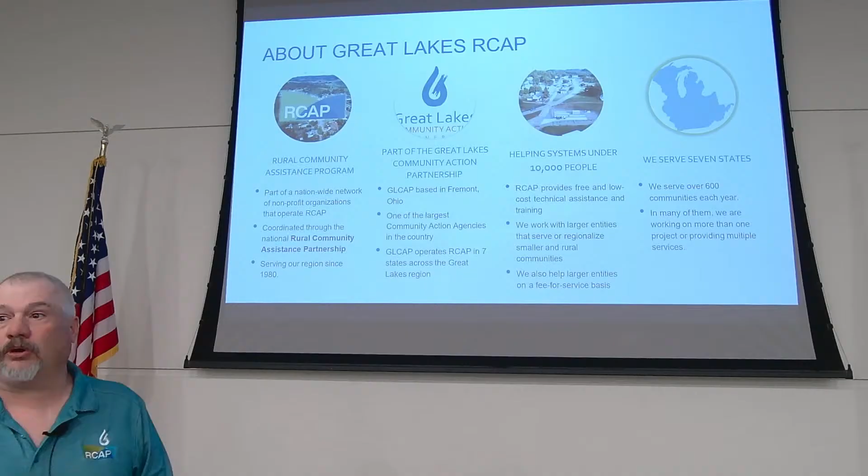So James talked about it, there's a few slides here of what we do. Again, this is a national program. Our region is the Great Lakes region. We're based out of a headquarters in Ohio, but they do have dedicated employees in the state. And again, I'm here locally. I have business cards up here for anybody that needs to talk technical, and you guys fit within our realm. Generic, our mission: improve surface water protection, environmental compliance of water and wastewater. The US EPA funds us.

Go back. Oh. I feel like I'm, because of this camera here, I'm trying to get in front of everybody. So

Again, we have to put these things in our presentations because that's who pays us to do these trainings. So again, we've got a couple people that we need to get some pictures of up here.

Myself and James. I am a licensed water and wastewater operator. I do have experience in class 2 systems. I'm not a class 2 operator. I was going to go take my exam when Illinois American bought our place, and they told me I didn't need to, and so I haven't had a requirement to since. But I do have fairly serious experience in Class 2, and I was going to go get my exam right during the buyout. So I am a Class 3. I'm a Class B water operator with time in an A system.

So, we've done introductions and overviews. We're going to talk about lagoon types, aeration methods, lagoon design configurations, roles of algae, thermal turnover, and pros and cons of lagoons. There are tests. We're not going to issue any tests, but there are tests in this training, so we'll kind of skip over those slides.

One of the items when we were asked to come do this training was a question on feedback to you guys on herbicide chemicals to use around lagoons. Unfortunately, because of our federal funding, we're not allowed to endorse any certain brands or things along those lines. But I wanted to make sure that in that conversation I did elaborate, when we get to it, on what you should look for when you're trying to do weed control.

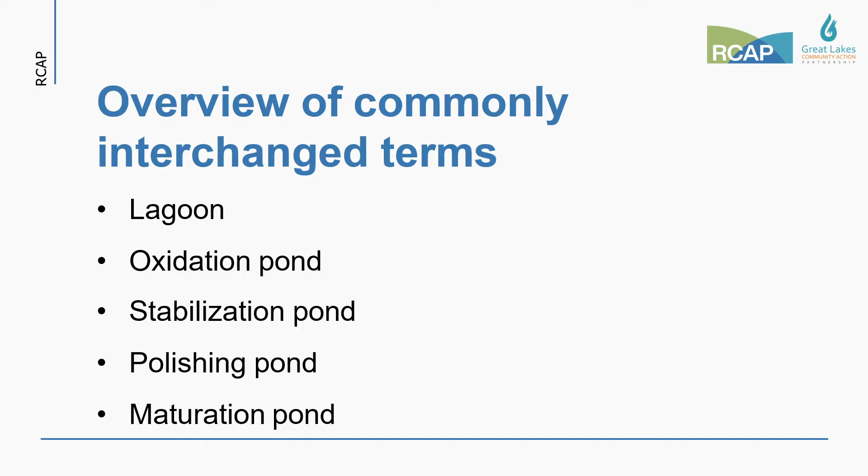So, commonly interchanged terms: lagoon, oxidation pond, stabilization pond, polishing pond, maturation pond. So we have 3 types of lagoons: anaerobic, facultative, and aerobic. Facultative is essentially a combination of aerobic and anaerobic zones, which most of these operators in here, I believe, would be.

Am I out of the picture? No.

Especially dealing with activated sludge, you're doing your different zones within your oxidation ditches and things along those lines. We know with the treatment of wastewater, in order to get full treatment, we need a combination of aerobic and anaerobic processes to completely provide that treatment.

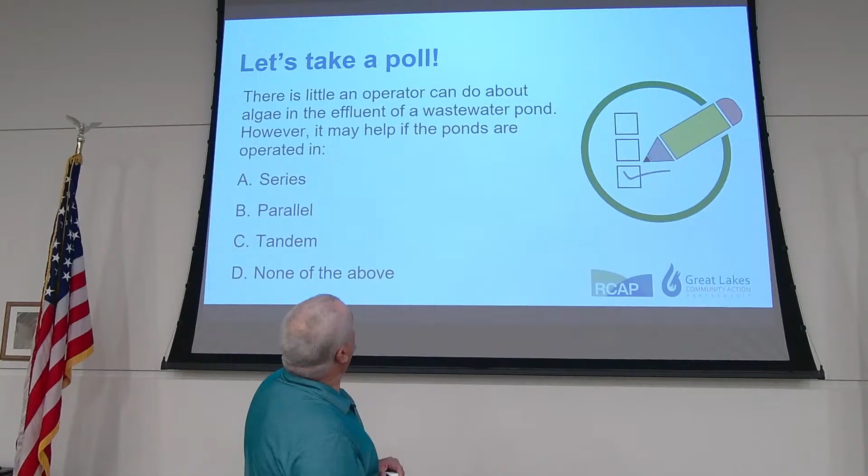There's little an operator can do about algae in the effluent of a wastewater pond. However, they may help if the ponds are operated in series, parallel, tandem, or none of the above. I'm not necessarily looking in this training to test you guys on there. We would control the algae in series. We would try and contain the algae in one particular cell where that activity is taking place as part of the treatment process.

So here are some different applications: aerobic, facultative, and anaerobic. Anaerobic is commonly used in industrial wastewater. Your loading of BODs or CBODs, typical detention time in days, typical depths and comments. Subsequent treatment normally required, because to truly fully treat wastewater, you're going to need a combination of aerobic and anaerobic. So a lot of places are using facultatives, or they're setting it out in series, to get those zones taken care of.

So, facultative is common: raw municipal wastewater, effluent from primary treatment, trickling filters, aerated ponds or anaerobic ponds. Aerobic is generally used to treat effluent from other processes, and produces effluent low in soluble BODs and high in algal solids. So there is some aspect there of why you would pick one versus the other.

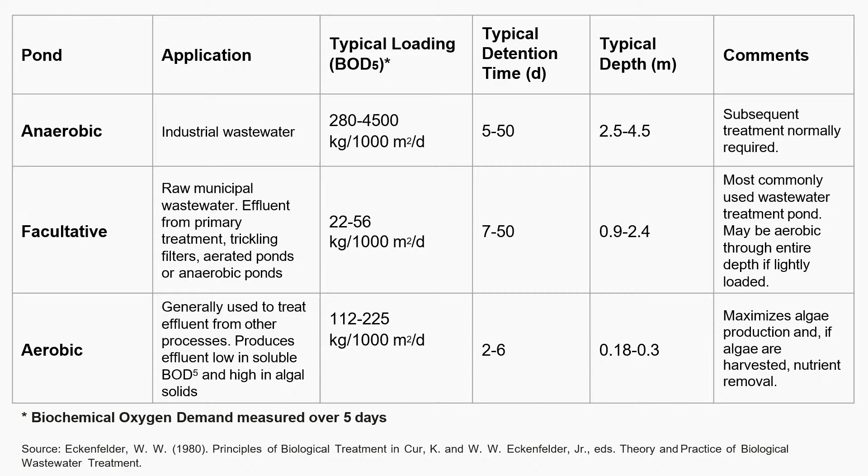So, do we have any lagoon operators in here? Okay. You want to talk about your lagoon at all? Good old Farmington? No? You're running facultative out there, right?

Facultative lagoons, again, it's about a balance. A lot of times these facultative lagoons are one cell. Is this a pointer? No. You have influent coming into the pond. It's based in zones. Your facultative bacteria and anaerobic bacteria are intermixed among the zones. It's very common around the 8-foot to 10-foot level in facultative lagoons. That's kind of where they're designed anymore. I haven't seen any deeper than that. Doesn't mean they're not out there.

So in those facultative lagoons, we want both processes happening. Facultative lagoons operate on a diurnal cycle. Anybody know what a diurnal cycle is? Day-night cycle. So in these facultative lagoons, you're going to have DO changes throughout the day.

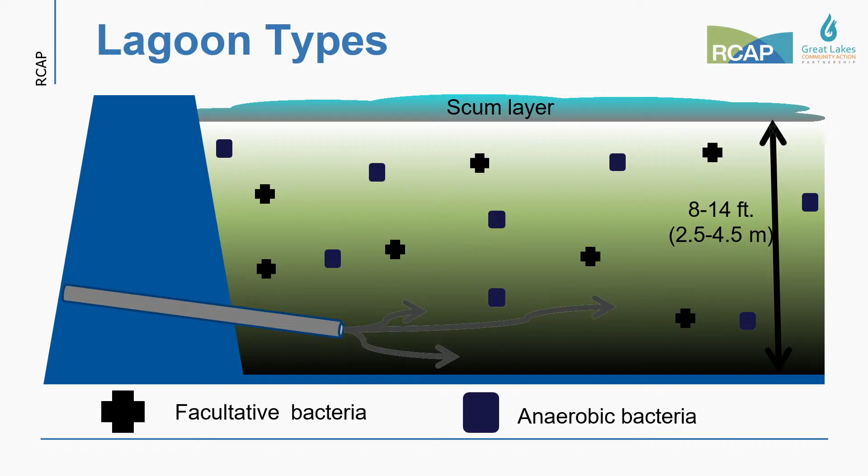Anaerobic lagoons are used mainly for the treatment of high strength or commercial wastes. They lack dissolved oxygen throughout. The treatment depends on fermentation of sludge at the bottom. It's highly effective in destroying organic wastes. Depths are typically 8 to 14 feet. Effluent requires further treatment, because you're going to have ammonias and nitrogen content coming out of that anaerobic environment, and now you need the algae consuming that. That algae growth is consuming the NH3, taking it in and dividing to build more cellular microbial algae.

Take a poll: in the anaerobic portion of the facultative pond, organic matter is converted into carbon dioxide and ammonia, and then into algae in the presence of sunlight. True or false? Anybody?

Methane is usually produced in the anaerobic. So, again, facultative lagoons, we have the bacteria. This is a 3 to 8 foot facultative lagoon. I've never seen one that shallow, but that doesn't mean they're not there. This is just part of the training project that we're given, that we go through and we alter.

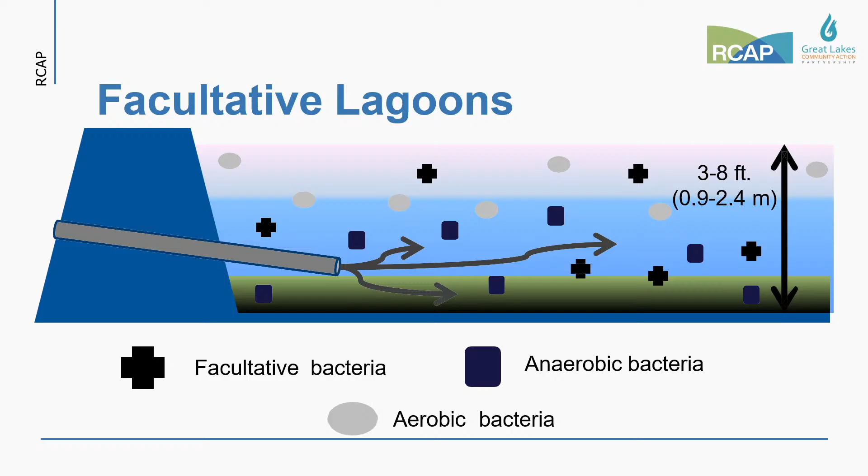Having the anaerobic and aerobic bacteria mixed in. Again, the anaerobic portion is a lot of times breaking things down. That's where your methane gas comes from. Methane gas has hydrogen and nitrogen and carbons in it. That's part of that process. Your ammonia comes out of that, and then you're using that algae to break that down further.

8 foot deep, at least 7 foot of that is sludge; there was only 1 foot of freeboard. It is red. Everything is dead, just like a red tide. That primary cell has just got water going into it. Nothing's happening. And then the water coming out into the second cell has turned into nothing but an algae bloom, and that water's pea green. And this is what they're discharging.

Well, needless to say, that's why the IEPA is there right now, because there was no activity for a long time. And we got called in to help them try and find funding so they can do dredge work and get rid of that sludge so they can actually get the lagoon operating again.

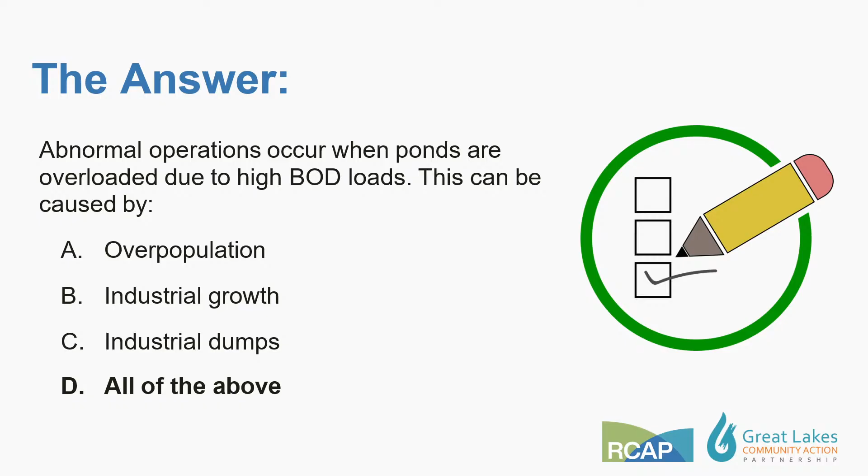So aerobic lagoons, again, that's the use of dissolved oxygen coming in, providing the treatment. Dissolved oxygen throughout all depths, not just zoned off. May use aeration devices to create supplemental oxygen when there may be some depth to it, so it's not enough sunlight, maybe it's turbid, so oxygen can penetrate the wastewater. Used for domestic and industrial wastewaters, low and medium strength. Keep hitting the wrong button. Aerated lagoons require less land and shorter detention times.

Just a couple examples of aerobic lagoons. Another poll: during the day, the algae in a pond consumes carbon dioxide, which raises the pH, while at night they produce carbon dioxide, which lowers the pH. True or false? True.

Part of that process of the algae taking ammonia out of the water also consumes carbon dioxide. It's photosynthesis. As those algae cells grow and divide and create more algae, that's what's consuming the carbon dioxide that's being produced by the anaerobic. Plus, it's producing DO to go back into your aerobic. So again, that change in carbon dioxide will change the pH.

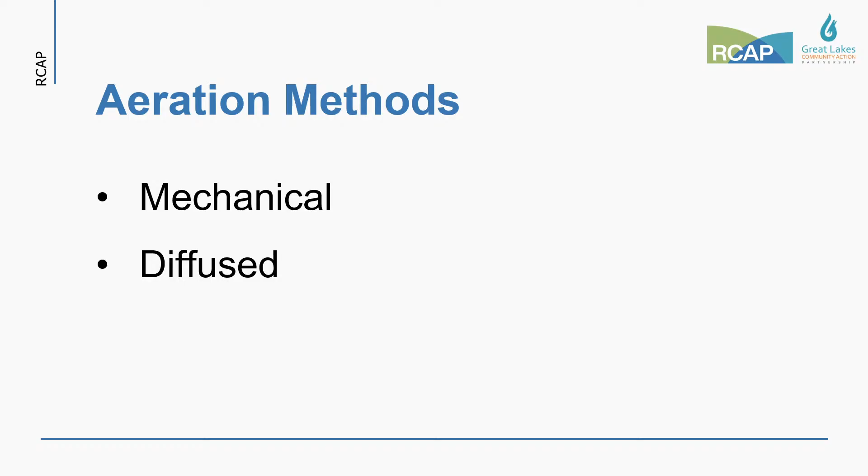Aeration methods, mechanical or diffused. I'm assuming most of you guys are, there's only a handful of lagoon guys here. What aeration do you employ, Mike? Wind? Common? You guys got a lagoon? Okay. Air compressor, diffuse type?

Okay. Okay. Turbulence, disturbance? Okay.

So I actually had one of these in Glasford that was horrible, because in the wintertime that stainless steel gets cold and it turns into nothing but an ice block. One of the things that I changed before Illinois took over: in the waterfowling world, and I am a duck hunter, Mike's also a duck hunter, they make this device called an ice eater that is very good for pulling water from the bottom and pushing it up to the surface. So during freezing temperatures, we can keep an open water hole for our hunting.

Well, I actually took one of those and installed it into my lagoon to keep that process going, because he's talking about wind. Wind going across the pond actually puts DO into your lagoon. So if you can keep open water in the winter, that was one of the aspects that I used in order to keep my DO up. Any questions?

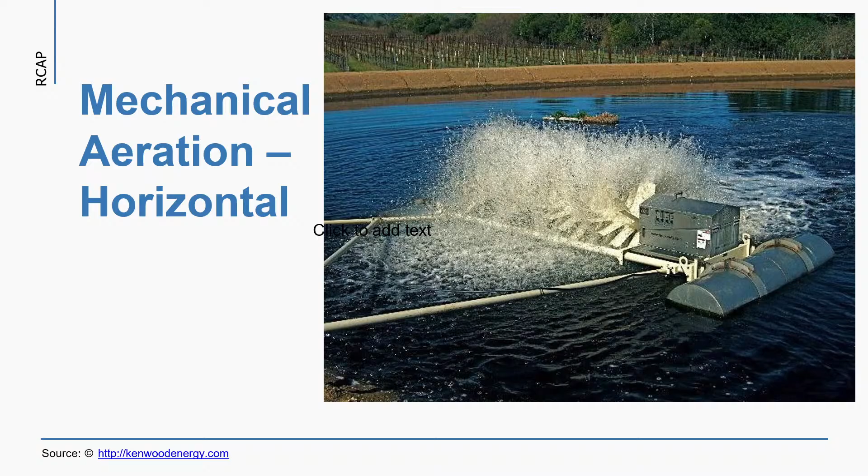Mechanical aeration, horizontal. This is actually very close to an aeration version that I had at the Lakeside plant in Glasford, where I ran extended aeration ditches, and we had paddles like this in both ditches that actually beat dissolved oxygen into the water. Stir agitation, diffused oxygen through compressed air being plumbed out through a distribution plumbing system.

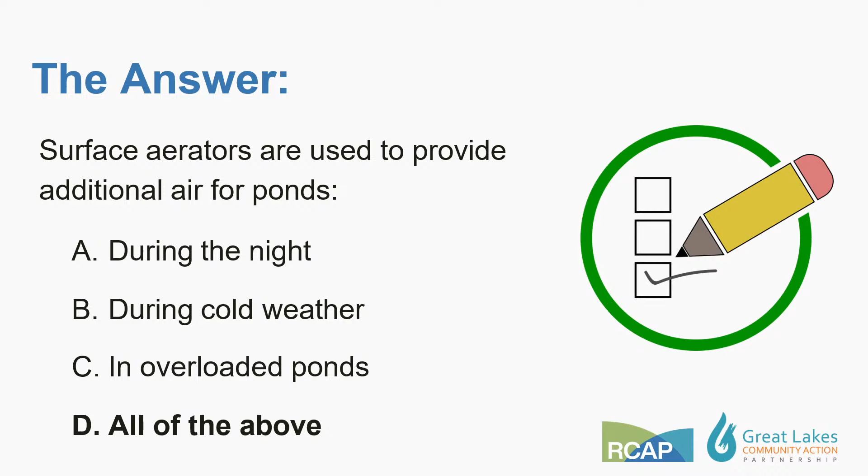Aeration and energy efficiency. Aeration can be 50 to 60% of the energy used at a wastewater treatment plant. If you're running a gravity system, like you would with a lagoon, you may only have 1 or 2 pumps, but you're also running an air compressor to diffuse aeration. It could be a sizable portion of your energy costs. So properly using the pneumatics and hydraulics to the most efficient advantage will help you overcome some of your financial issues. Doing good maintenance and keeping it running efficiently.

Coarse bubbles versus fine bubbles. Fine bubbles can be 35% more effective versus coarse bubbles. The smaller the bubble, the better your oxygen is going to dissolve within the liquid. Blower size data, raw data versus effluent data, evaluating your influent, your effluent, and maybe picking some place in the process for doing another test. How do I look here?

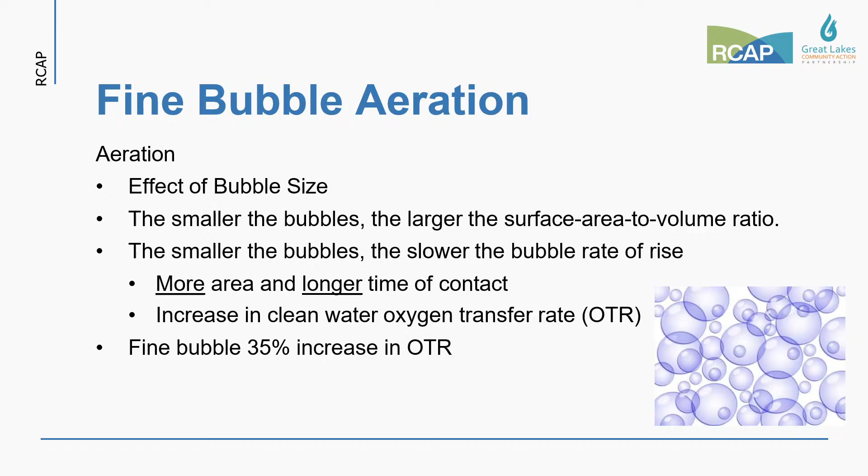Fine bubble aeration affects bubble size. The smaller the bubbles, the larger the surface area to volume ratio. The slower the bubbles will rise in water, meaning more contact time. Increase in clean water oxygen transfer rate. Fine bubbles, again, 35% increase in the transfer. Lagoon configurations, we talked about series and parallel.

Having series where you're going to have, say this is a primary cell. This is more of a cell where you're going to do some polishing, and maybe this is a final cell along there. Or they do it in parallel. And that means all 3 of these would be doing the same functioning, and you're just dividing your inflow load of treatment across.

So, Mike, what do you got for your configuration? You just one pond? Secondary? Okay, so you're doing a polishing in cell 2. Okay.

So limitations of wastewater ponds are odors, high suspended solid levels in the effluent, treats waste inconsistently, may contaminate groundwaters, requires large area of lands. What do you think they are? All the above. So you can have odors come out of lagoons.

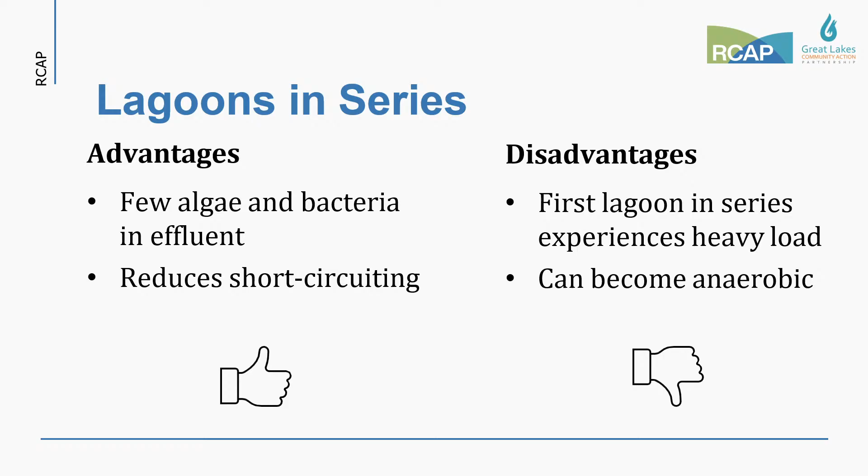The general rule of a lagoon effluent is clear, sparkly, with a slight green tint. That is good health of the lagoon. You have just a little bit of algae growing there, and it's keeping things in check.

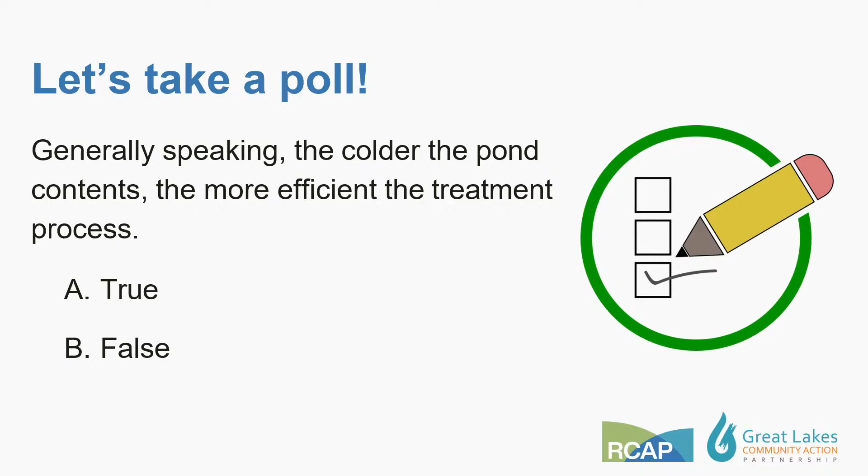Generally speaking, the colder the pond contents, the more efficient the treatment process. True or false? False is correct.

Pros of lagoons: life expectancy. As long as the sludge blanket's managed, they can go longer than 50 years, and you're at least doing some level of management of what your bug activity is doing. They're simple to operate and maintain. They're the lowest licensing requirement in the state of Illinois.

Little to no energy requirements, limited to pumps and aeration. Other than that, you're letting nature do its work. Cost effective to design and construct where land is inexpensive. It's effective at removing pathogens. Effluent can be suitable for irrigation, and they can handle shock loadings better than most systems. In reality, they can handle a sizable hydraulic load shock compared to an oxidation ditch, especially.

Cons of lagoons: they require more land than other treatment methods, are less efficient in colder climates, and may require additional land or longer detention time. They can have odor control issues. They can provide breeding areas for mosquitoes, which there are some techniques we can talk about. Not very effective at removing heavy metals. Those are going to settle out, and depending upon what type of influent you're trying to treat, that can be a concern in some areas.

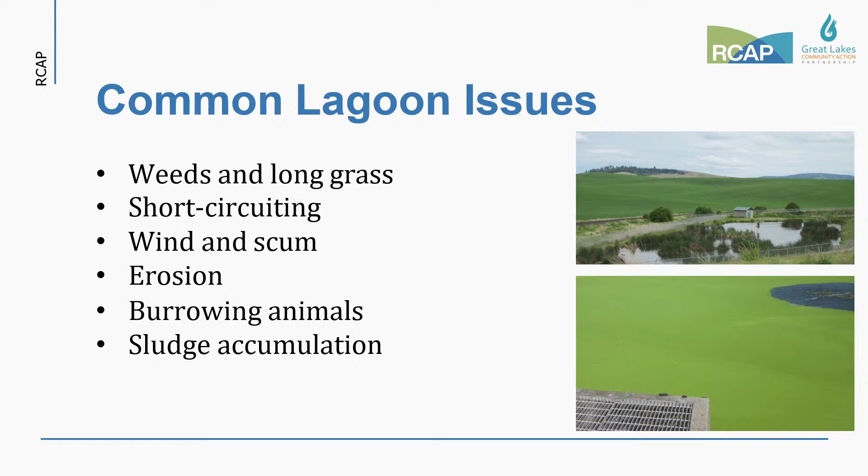Inlet to a pond should be blank to distribute the heat of the influent as much as to minimize the occurrence of floating material. Anybody? Submerged. We don't want that raw influent into the lagoon coming out into the open air. We want it injecting into the pond below the surface.

Short circuiting we talked briefly about. Okay, this is one unit. Short circuiting means the water's flowing here and basically flowing through here. Now we've got a dead spot in that lagoon here and a dead spot in that lagoon here. So how would we baffle it to make it more serpentine to go out and get that right detention time? Because when you start short circuiting, that's a quicker line through.

Wind and scum. So sometimes wind can be your friend. When you do have scum, use that to your advantage when it blows down to one area. And again, we talk about that boom off method. You may be successful in taking that floating device, just like an oil boom, containment boom, and pulling it, tying it up to a vehicle, and pulling that material up on the bank and get that out of there.

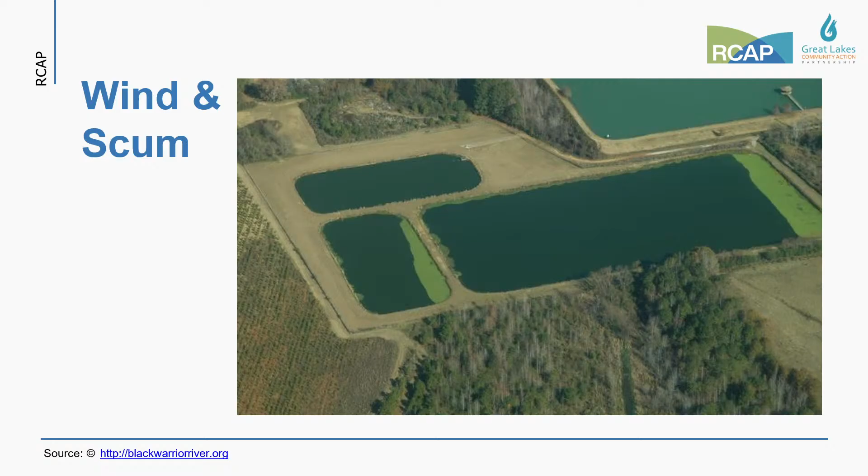Erosion and burrowing animals, obviously this is not a good thing. Weeds and long grasses, again, giving that habitat to those animals to hide. And you wouldn't even see the burrows. So operator should use blank as a last resort for weed control due to hazards facing the operator and the dangers facing biological growth in the pond and receiving waters. Be careful with the herbicides. Some herbicides will not work well with a lagoon. They'll kill off your life as quick as chlorine will.

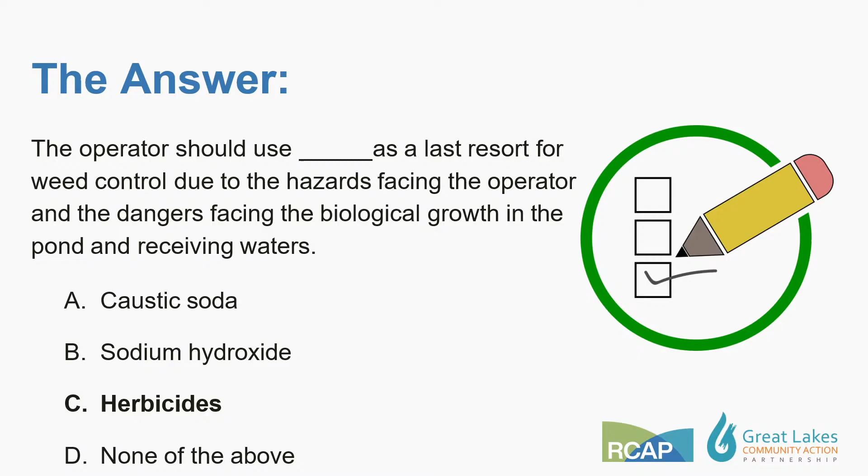Clean looking lagoon, routine maintenance inspections. Preliminary treatments, most common, some sort of headworks with grit removal. No primary treatment at all, but screening is desirable. Screens remove large solids so they're not getting in there. Influent flow rate can be measured if there's a Parshall flume there. Operator's responsibilities: clean and maintain, check the diffusers, make sure everything's working.

Fouling of diaphragms, biggest drawback to using compressor diffusers. Cleaning and preventative maintenance is the answer. Using diffusers for this kind of, I think, should have been up a little bit. Diffusers, distribution of air, look for dead zones. Huge rolling air bubbles are a sign of blown diaphragms.

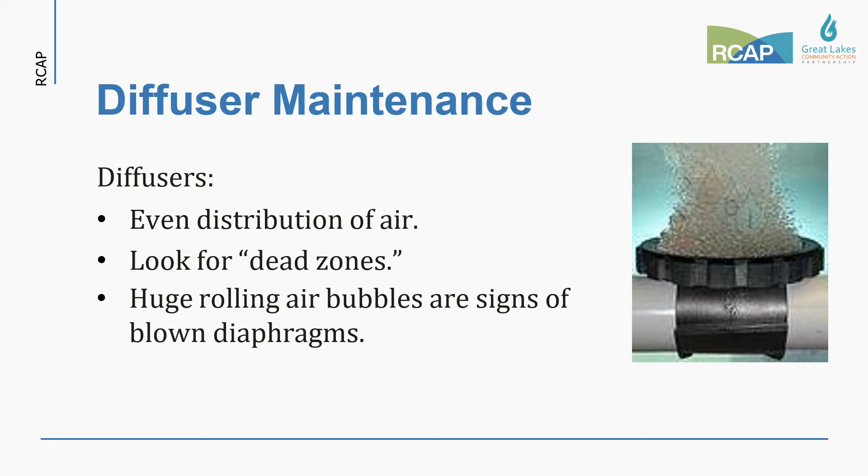We're getting pretty close to time here, so I need to jump forward. Okay. When starting a new pond, at least 1 foot of water should be present before wastes are introduced when possible. That would be true.

So we're basically here at the end. I'm still developing this slide. I was talking with Shannon earlier. I actually did a version of this at a homeowners association here about a month and a half ago. And I'm bouncing some of this information around a little bit, and I need to do a little bit better job with this. So you guys got any questions on lagoons? Unfortunately, it's kind of a boring subject for most of you guys.

Nothing? Bueller? Okay. Well, I'm going to, yeah, okay. You want me to show this?

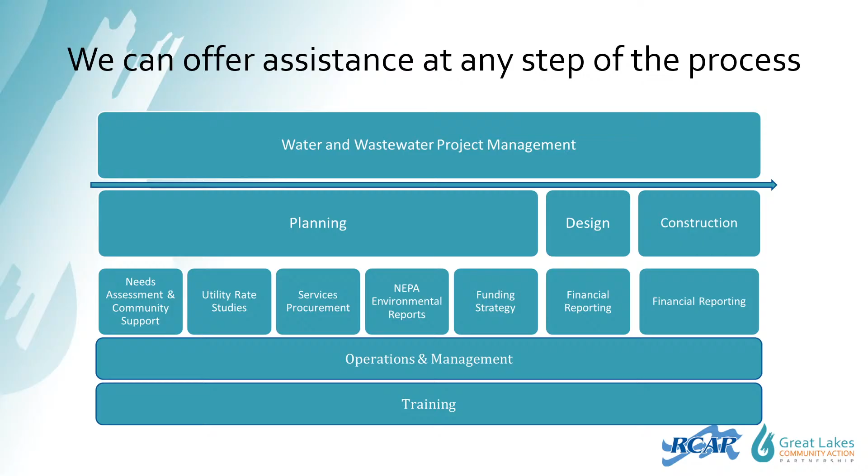All right, so small community wastewater challenges: demographics. Again, we're looking at these smaller communities, unincorporated areas. HOAs also could severely benefit from these as well. We're seeing HOAs that put in lagoon and sewer systems at some point in the 60s and 70s, but now they're starting to fail. And unfortunately, those HOAs or neighborhood organizations don't have the funding to upkeep those lagoons or redo them or any sort of wastewater system that they may have. So looking into an alternative for them as well.

Smaller populations and no growth areas. Again, your geography is going to be very big on this. Two, is regionalization being prevented? Can you not pump anywhere? Are you located in a floodplain? And also your finances. And again, that's going to be our major part in this.

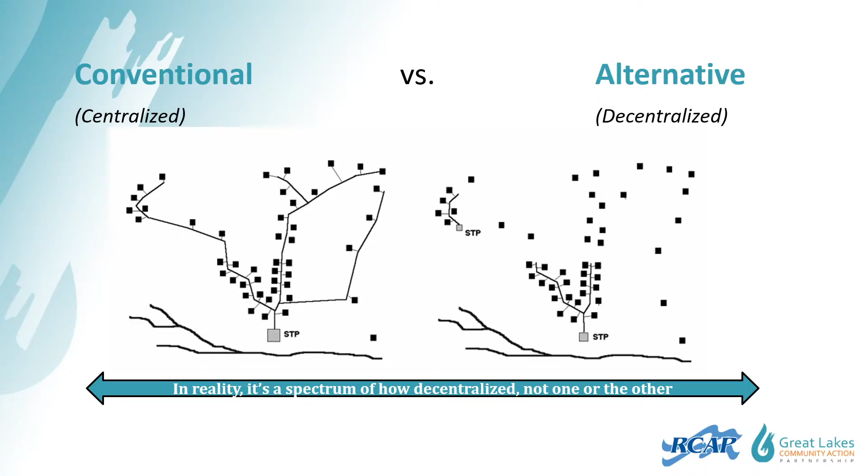So again, kind of talking about your community vision, and again, this is going to be focused on rural communities because that's who we work with. But potentially, I could never see a whole city using one of these, but I could see neighborhoods within a city have these types of systems.

So if you have an area that might be a little bit more isolated, or like I said, an area that is kind of on the fringes, or an HOA or a subdivision that was built a little bit far out, but now is starting to become incorporated into the city, but that sewer system isn't there yet, these could be used for them as well.

So the bottom line, the approach, it's the economics. You want to maximize your economic value. You want to benefit the environment and society there as well. You want to make sure that you meet those objectives and that basically at the end of the day, everyone is able to get rid of their wastewater in a clean and proper way.

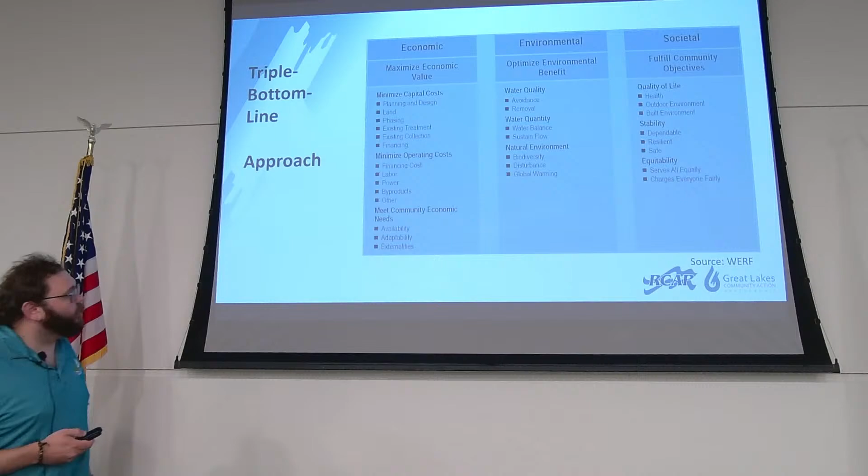If you do have any of these water-dependent industries, you want to look at your contaminants as well and your peak gallons per minute within the industry. Again, especially in rural communities, if this is your only industry or the only thing happening within the city, it's something you want to be aware of just so you are aware of how many gallons are flowing through the system.

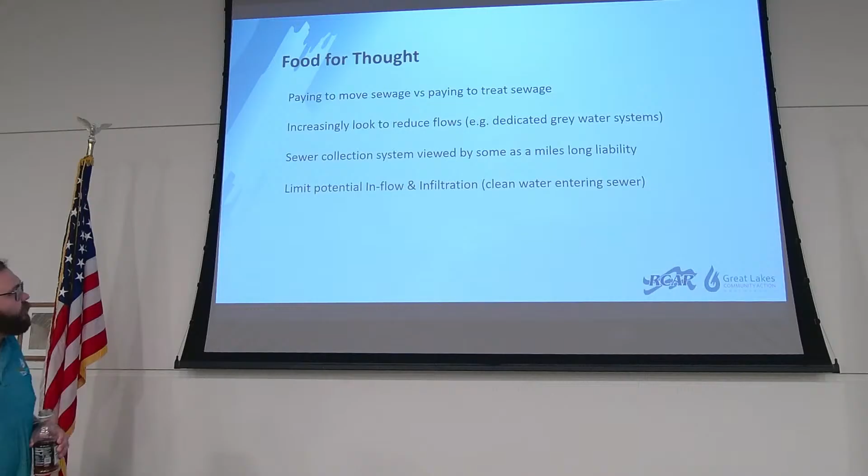Again, food for thought, paying to move sewage versus paying to treat sewage. Increasingly looks to reduce flows. Sewer collection systems are viewed by some as mile-long liability, and limiting potential I&I and clean water entering the sewer is always something you want to take into thought, especially as we start looking at these systems.

So is your community's land appropriate for an alternative wastewater system? Obviously, that's going to be one of the first questions that we have to ask, because if your land and your topography is not going to work, we need to maybe think about something else. Sandy soils' efficacy is impacted by the strength of the waste. You can safely move more water, but it must be lower strength waste. So again, you're going to have to look at your waste strength in your sandy soils.

Clay soil, which we see a lot of here in the state of Illinois, handles high strength waste well, but clay makes water transmission difficult, so a large dispersal area is necessary. So again, if you do put in one of these cluster systems, you're going to have a large area where that dispersal takes place.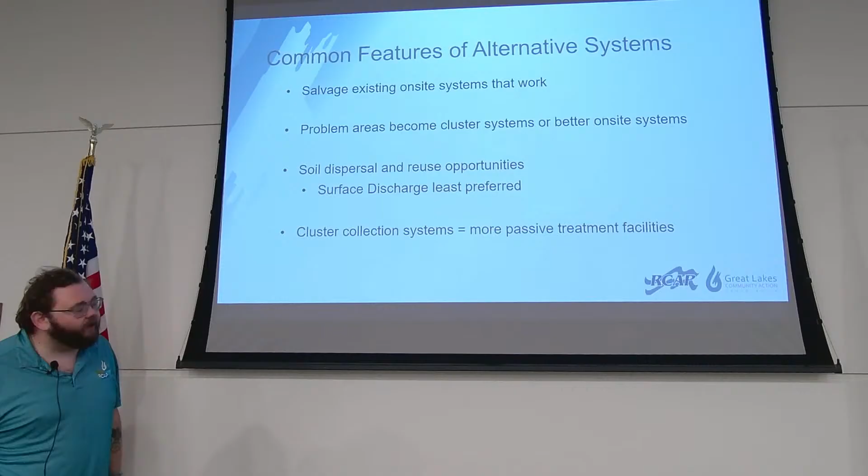So this way, it's the best of both worlds: that individual who has done everything right, who is keeping up their septic system, who's not running into failure, can continue to harness that and get the value out of their investment, but is also now being tied into a much larger sewer system.

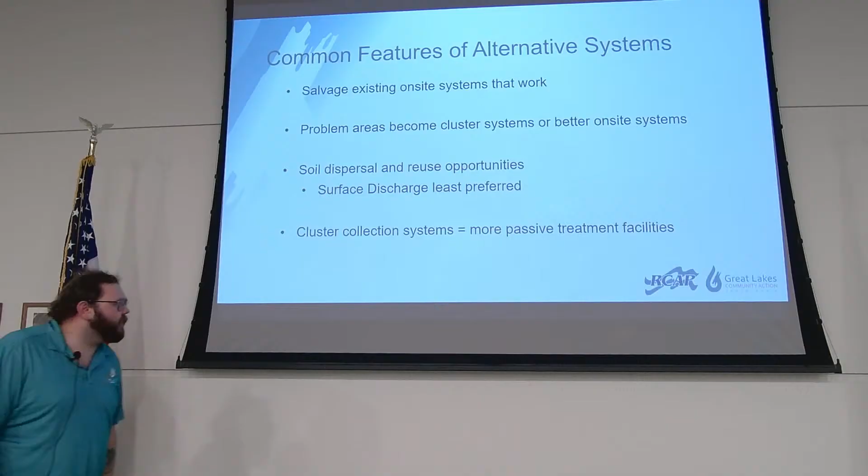Problem areas become cluster systems or better on-site systems. Soil dispersal and reuse opportunities. Again, surface discharge is the least preferred, so that's what we're going to try to avoid. And cluster collection systems equal more passive treatment facilities. So you're going to have a little bit less treatment facilities in these cluster systems because a lot of that treatment is being done within the soil or before even leaving the homeowner's home.

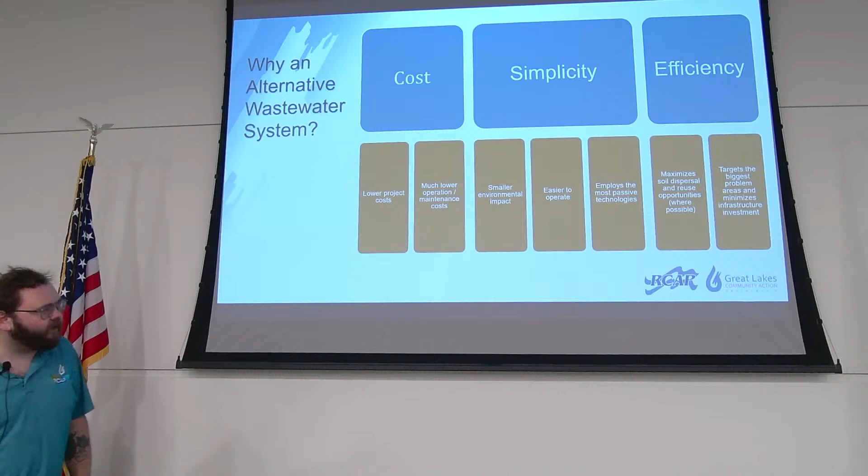So why an alternative wastewater system? We already talked about some of these, but cost is going to be your biggest one. It's going to lower project costs, and it's much lower operation and maintenance costs as well. Once they're put in, they basically kind of run themselves. A lot of them, you would want a wastewater operator on site, but the day-to-day activity is going to be severely less than if you were running a traditional wastewater treatment plant.

The simplicity as well. So again, they have a smaller environmental impact. They're easy to operate. Once again, it is put in and employs the most passive technologies. And looking at efficiency, it maximizes soil dispersal and reuse opportunities where possible. And it targets the biggest problem areas and minimizes infrastructure investment.

So again, we're investing in the infrastructure, but we're minimizing what we're doing. We're not putting in that larger wastewater treatment plant. We're using what we already have. We're tying into the smaller parts of the community, or we're looking around to see what exactly is happening.

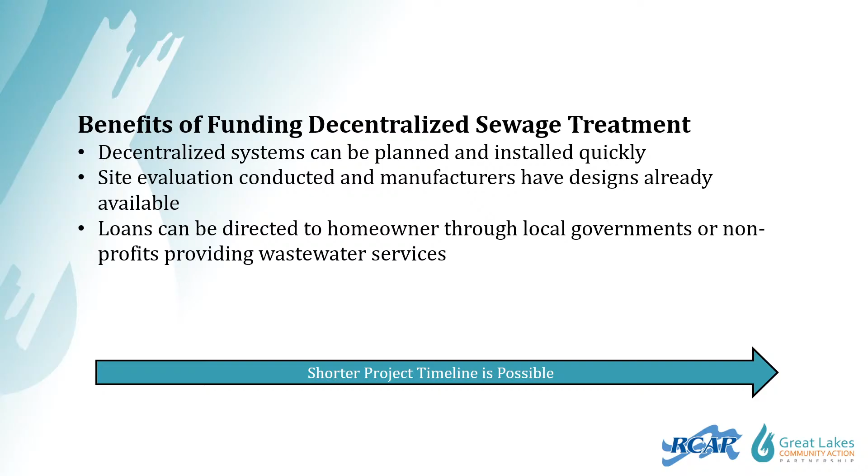So, benefits of funding a decentralized sewage treatment plant. Decentralized systems can be planned and installed quickly. Site evaluation is conducted, and manufacturers have designs already available. And loans can be directed to homeowners through local government or not-for-profits providing wastewater services. Again, that would be one of the ways that you could help get it funded, possibly going through the individual homeowners as opposed to a government entity taking out the loan.

And the speed, like I said, if everything works out well, they are fairly simple to put in once you get the ball rolling on them. Again, you keep costs on a short leash. You pay as you grow, or right size just in time. So again, these allow for more growth if you have a community that begins to grow or even begins to shrink a little bit, so you're not worried about your maximum capacity.

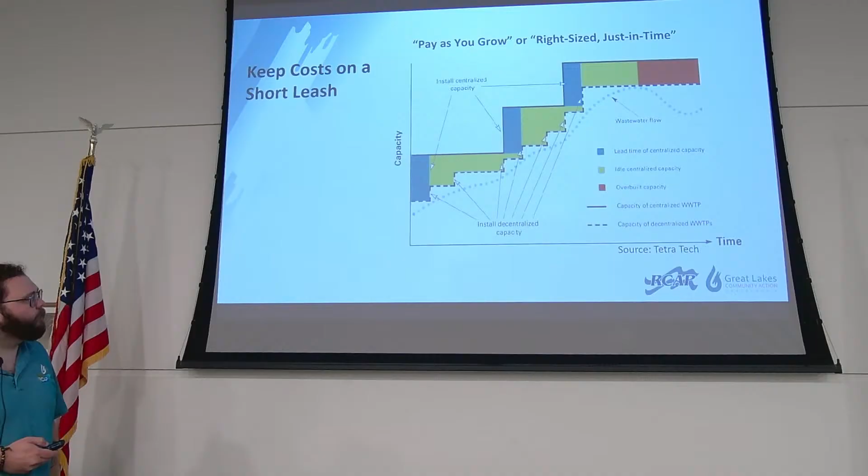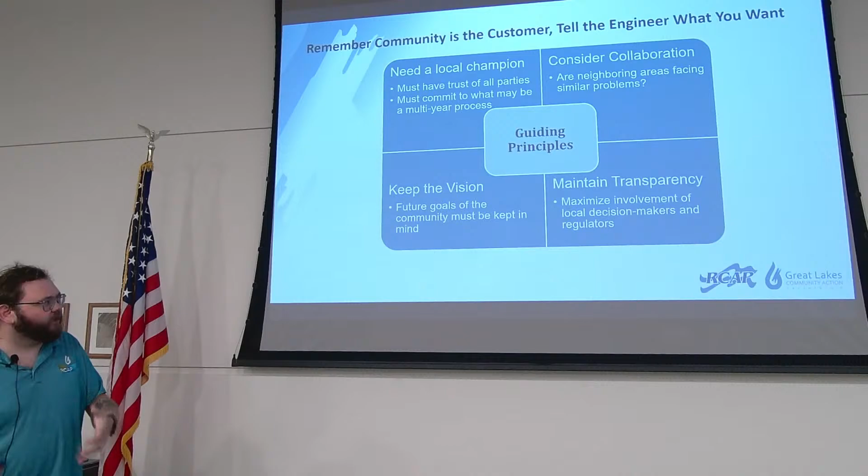Remember, community is the customer. So if you do look into these, speak with the engineers about what you want and inform them about it. Like I said, when we had one of these going for a while, finding the engineering firm and explaining it to them was one of the things we ran into the most. And that is something that RCAP can come in and assist with as well. We have some familiarity with these systems. I've been to a number of trainings on them throughout the country. So understanding what they are, explaining that, and what resources are out there for them is going to be paramount to having a successful project.

So again, few experts in both. You've got your experts in conventional centralized systems and your experts in decentralized. So finding that mix is one of the things we want to look into. Look at your wastewater status quo. Most wastewater infrastructure planning is done by experts in the centralized system.

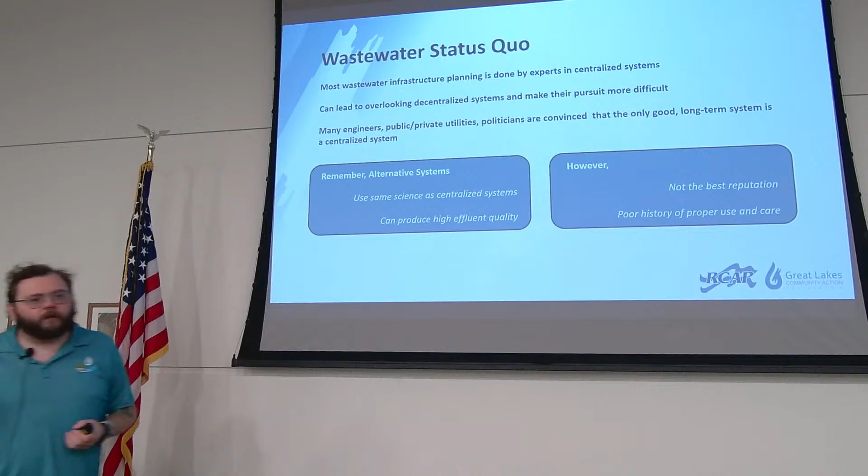We understand that, but we also have to start understanding that maybe we do need to look for alternatives for these smaller rural systems with failing wastewater infrastructure as we move forward. What are we going to do if regionalization is not an option, if we cannot tie them in? Then we need to start looking at something that is affordable for the community that they can help run long term, and this is an option.

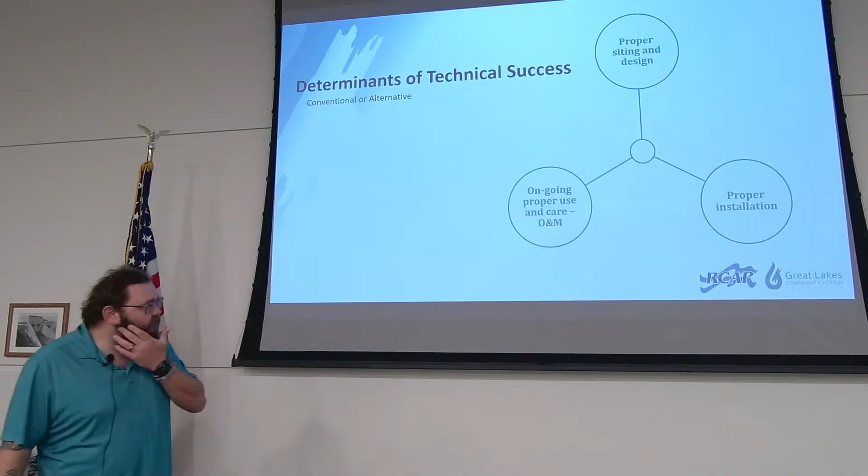Also, if you do go the route where you're already tying in some older septic tanks, or you're using a septic system to join in the cluster, you want to write in who's going to be responsible for that once it does start to fail, and make sure that an ordinance is put in that it's either going to be on the homeowner or the runner of the system, whatever pertains to what you decide.

And again, proper installation speaks for itself, but you want to make sure that everyone's licensed and that installation is done properly, and that you're not going to have any issues once you get up and running, because the last thing you need is something to get tanked as soon as you begin it.

Compliance and management, managed like any other utility. You're going to have your discharge permits, you're going to need those, so you'll need your wastewater operator to be on top of that. You'll be working with the EPA for what exactly the discharge permits are, and rate adjustments as well. So again, you're not taking away the bill from these.

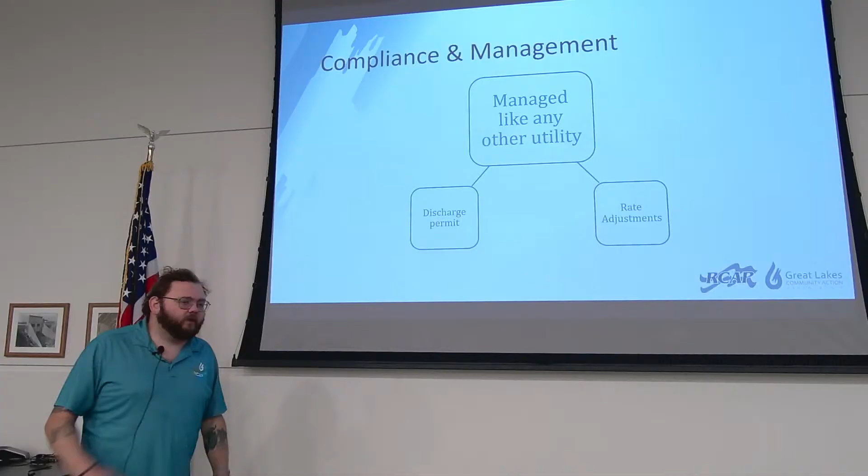You are going to be billing customers monthly for these systems, and it's purely because you need to be able to afford new ones. You need to be able to afford components. You need to be able to afford staff. So, it's not a one thing and we'll never get a bill again.

No, but you could reduce those bills, especially if you have a lower debt amount, or if you're running far less chemicals, power, that type of thing. You can lower those rates, but there will be rates, and you'll have to do rate adjustments on a yearly or biannual basis and work with it. So I'm talking about limits of affordability.

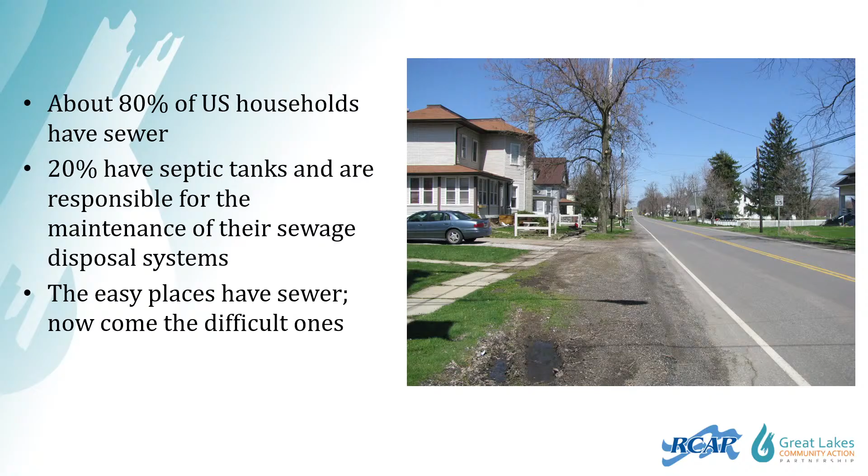About 80% of U.S. households have sewer, but what that means is that there are 20% of communities out there with no sewage disposal systems. And there's quite a few unserved communities that I'm aware of in the state of Illinois. Again, I live in Logan County, which has some significant rural areas, and I know about 4 or 5 communities with no sewer whatsoever.

So this is just a quick example. If you have a project cost of $4 million, there are 89 potential customers proposed for the project. We see this all the time. You have a small community. What are we going to do? That is about $45,228 per customer. If the median household income of the community is less than $17,000, that's fairly low, but I have seen it before.

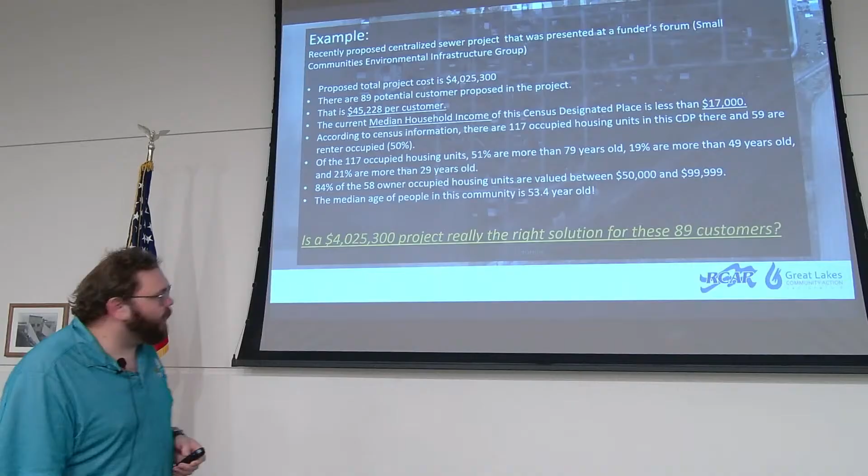So just looking at the affordability of this breaks it down to what some communities are facing, especially that 89 customers and a $4 million cost. What are we going to do? How are we going to afford this? What alternatives are out there? Because the last thing we need is to put in a system and then have people not be able to pay their bills, because that's when everything starts to break apart.

Especially if you take out a grant loan for this, you're going to need to pay that back over the course of the years. You're going to want to keep up with that operation and maintenance. Deferred maintenance is going to be the worst thing that you can possibly do on any sort of system, especially if you don't have the money for it, then you're going to run into much bigger problems. So basically, that was one of the examples there.

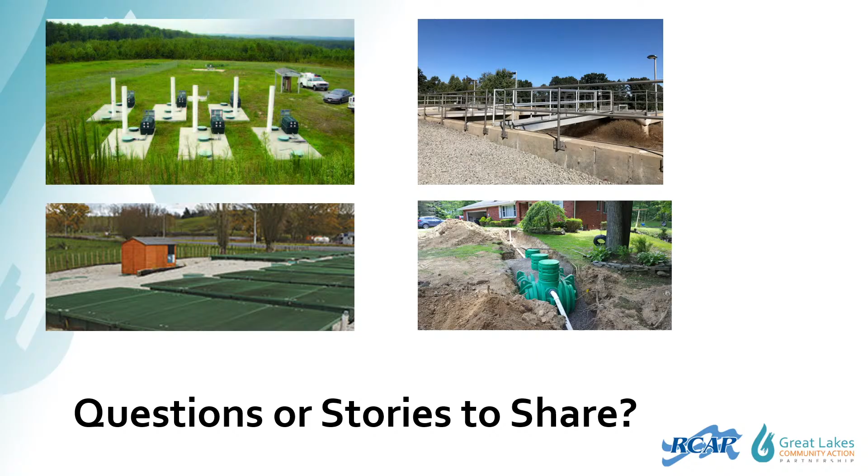So what is affordable? U.S. EPA considers the average annual residential sewer bill up to 1.5% of the median household income. We typically do between 1.5 and 2% when we're looking at rates for individuals. So think about your community as well: what is that 2% of your median household income? I will say most of the time I find that 2% is right on par or a little bit higher than what most sewer bills are for already established systems.

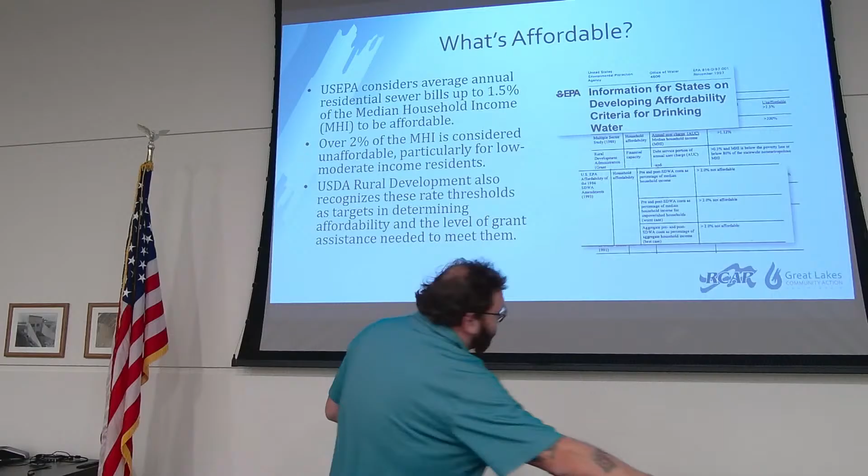But a lot of times those communities are not having a high enough rate, so they're actually losing money on their water and wastewater system. So while their current rate is lower than that 2%, they're not quite there. And so they need to raise it, and those newer systems that are going to be far more expensive are going to surpass that 2%.

So again, looking at what makes up your end user costs, the original project costs and debt. How much is it going to cost to be able to put the one in? Like I said, I had that one system at $15 million. They, I think, had less than 150 customers. They're not going to be able to afford that from the very beginning because they're taking on that cost and debt. And unless they want to pay $150 a month for a water sewer bill, which I know the residents would not be happy about, what do we need to do?

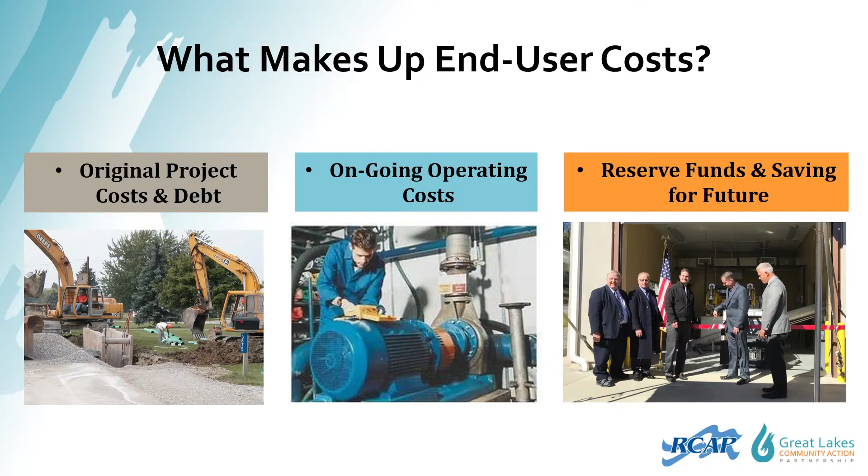So again, just looking at your big pipe versus alternatives, your original project expenses may include property assessments, loan debt payments, loan debt reserves, expenses and debt to demo and disconnect from existing on-site systems. Again, your ongoing operation costs, you're going to have your labor, your utilities, your fuel, your sludge disposal, your emergency repairs, IT, and permit renewals. And then obviously your reserve funds, what you have in there to be able to save for that lifecycle costs.

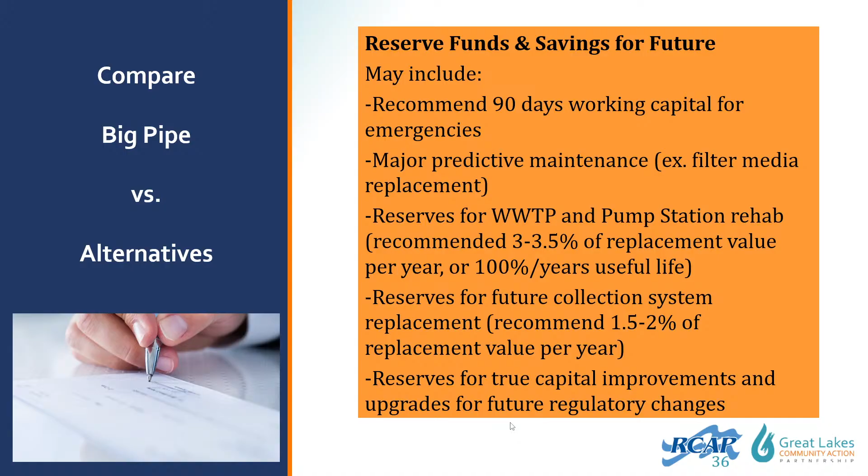So again, this is just looking at an example of a decentralized project. So how much financing were they able to save? They were able to get it down to a significant amount cheaper by looking at the decentralized system as opposed to the traditional system. So again, this is a true picture of the total lifecycle costs. Currently, this example town is in fiscal emergency because it could not pay its loan payments for a 12-year-old sewer system. So they're only 12 years into a 30 to 40-year term, and they're already losing it. Their monthly rates are already at $55 a month and increasing.

So this is kind of what we're talking about. What does the system need to do? How do we avoid situations like this? So again, rates are always going to be the biggest thing. With finances, especially working with municipal boards, they don't want to raise rates, and we understand that, but what do we need to do to be able to explain and help keep those rates down as low as possible so they're equitable and everyone can afford them?

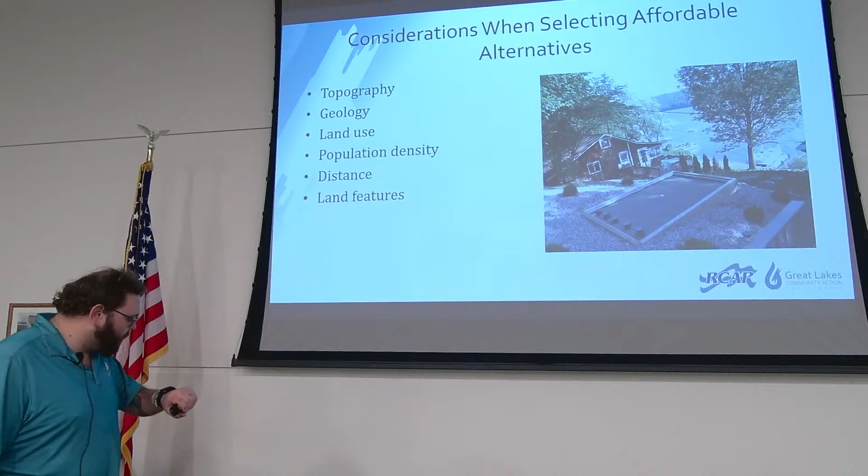So again, considerations when selecting affordable alternatives: your topography, geology, land use, population density, distance, and land features. So decentralized preconditions. Again, you want to see how many connections do we have. Obviously, if you have a large portion of connections, these might not be the route to go. You want to look at your smaller systems as well. Do you have any neighboring wastewater treatment systems? If so, is regionalization a better option than looking into these? And what types of failures could you have there?

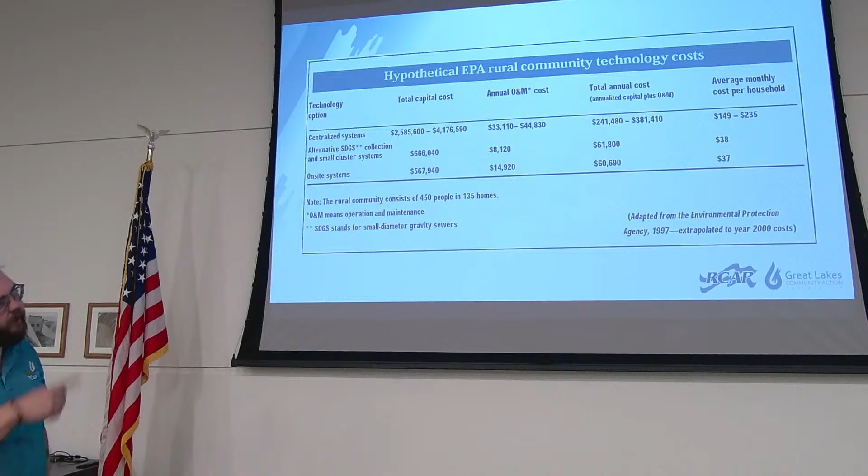So again, looking at your technology costs as well, your centralized systems. There you have your total capital costs. Centralized systems, you're probably talking between 2 and 4 million. Alternative systems or on-site systems, you can see there you're significantly less. Making up a significant amount of money there on your O&M costs.

And looking at the average monthly cost per household, you can see there. So again, I keep harping on this, but they are cheaper and they are more reasonable. Again, once you decide if you want to do that, you want to look at potential partners to see what can be done. You also want to reach out to community members to see if it's something they're even interested in, because if they tell you no, then obviously it's not going to work from there.

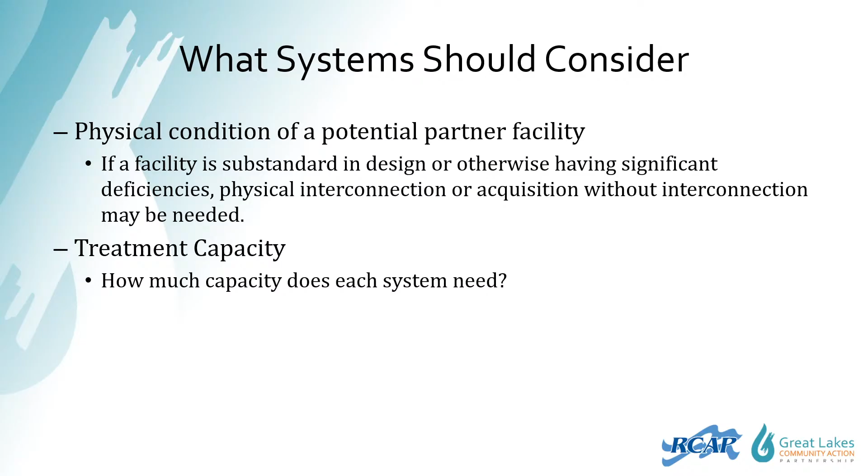So what should systems consider? Physical condition of potential partner facility. And treatment capacity, how much capacity does each system need? Geography as well. So interconnecting of two systems may be unlikely if the distance between the two is too large or interconnection is too costly. So again, if you are thinking about that regionalization idea, as opposed to the alternative system, you need to think about what needs to be considered.

Geography as well, is it even possible? Obviously, your adequacy of supply as well. If you're not sufficient, that's not going to work as well. Also, our state policies. Always work with your funders, always work with EPA to see if anything is even possible.

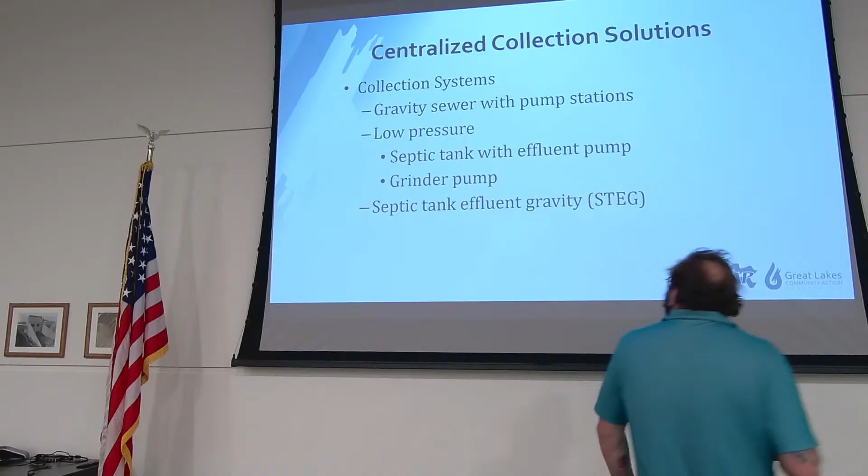So common wastewater problem areas identified. We have collection, treatment, I&I, sludge handling, and nutrient reduction. Collection there. Centralized collection solutions: gravity sewer with pump stations, low pressure, septic tank with effluent pump, grinder pump, and septic tank with effluent gravity are some of those basic centralized collection systems that we see.

Gravity sewer with pump stations. You got your cons, high capital costs, subject to infiltration. Pros, they're reliable with less maintenance and lower long-term O&M costs. Low pressure STEP and grinder systems. Pros, they're shallow collection lines with lower capital costs, less subject to infiltration. Cons, high O&M costs due to the number of pumps, and possible odor and corrosion issues as well.

So yeah, some of those grinder pumps can cause an odor once you start putting them in. So if you're thinking about using those in one of these decentralized systems, it's always something to consider and figure out what we need to do to mitigate that. Septic tank with effluent gravity. Cons, possible odor and corrosion issues. Pros, small diameter and shallow collection lines, lower capital costs and elimination of manholes. So you've eliminated more infrastructure going into the ground, which will keep your costs lower.

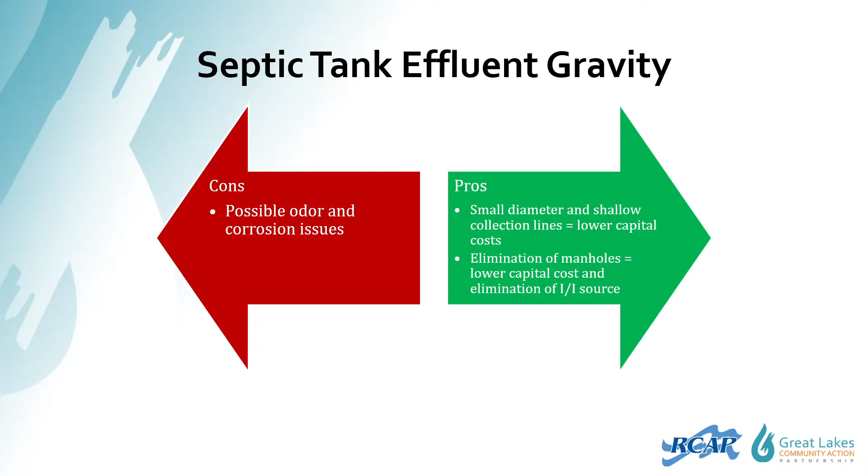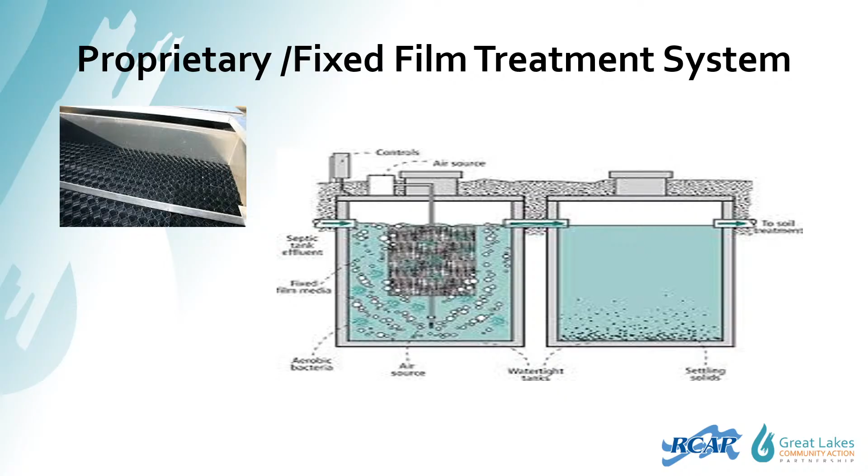So, your centralized treatment solutions: you have your conventional, extended aeration, oxidation ditches, package treatment systems, lagoons, and membrane bioreactors. So again, looking at the pros and cons of conventional systems, I'm sure you're all aware of these. Fixed film treatment systems as well, giving you a basic example of that. Lagoons, we just went over those.

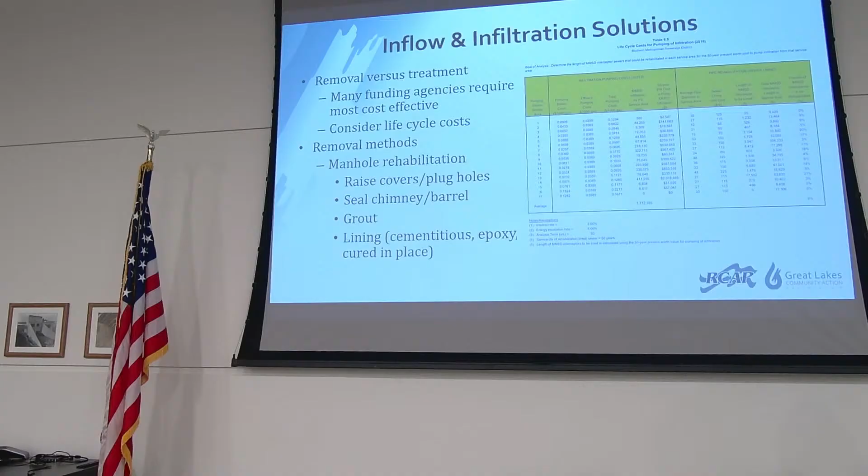So looking at a little bit of the I&I too, what do we need to do with that? Removal versus treatment. Many funding agencies require the most cost effective, so you want to also consider the life cycle costs. Some of these decentralized systems can help reduce your I&I significantly. That's one of the benefits, because a lot is happening within the system itself in the household. I&I solutions, you have your removal methods. You have your lining treatments, above and below grade, concrete, steel, and lagoons.

Talk about sludge handling solutions here. Filter bed systems, you have your sand, your interlocking media tiles, gravity flow systems, Roberts filter groups, belt presses, and rotary fan presses.

I will say one thing nice about these decentralized systems as well. It is a lot harder for a farmer to tie a field tile into it. I've run into 3 or 4 systems recently on the rural side who are convinced that there is field tile tied into their wastewater systems. They just don't know where it is.

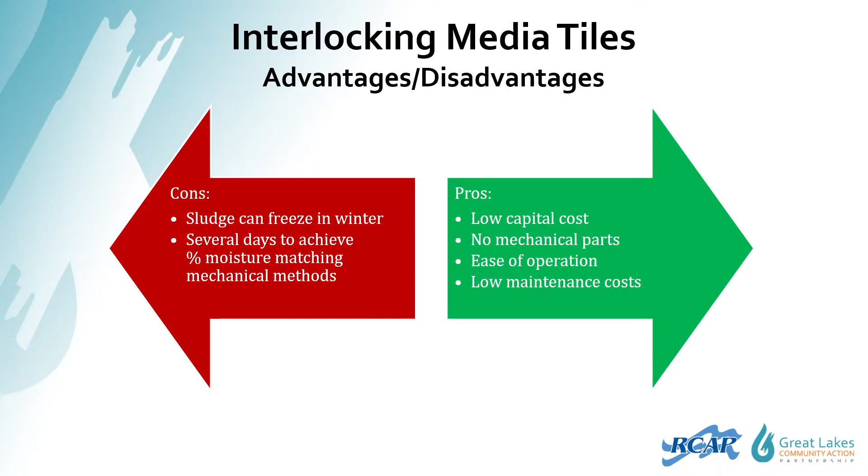One of these, that it would be significantly harder to do in the decentralized cluster system. So, talk about interlocking media tiles, the advantages and disadvantages. The pros are low capital costs, no mechanical parts, ease of operation, and low maintenance costs. Cons are sludge can freeze in the winter, and several days to achieve the percentage of moisture matching mechanical methods.

Talk about the belt filter press. Again, your pros, sludge cakes with higher percentage solid content. Cons, can require operation attention. Sludge must be screened well to prevent belt damage, and significant use of water. Again, rotary fan presses. So talk about nutrient reduction there. Again, what do we need to do with nutrients?

In decentralized systems, this does become significant as well, to be able to reduce those nutrients, especially because you could have higher amounts coming out of that first system or the households as well. So those nutrients might be significantly higher than what would be going through a traditional wastewater system. So what do we need to do to reduce those as they go through the decentralized cluster system? So you might want to add chemicals for phosphorus, and enhanced biological phosphorus removal.

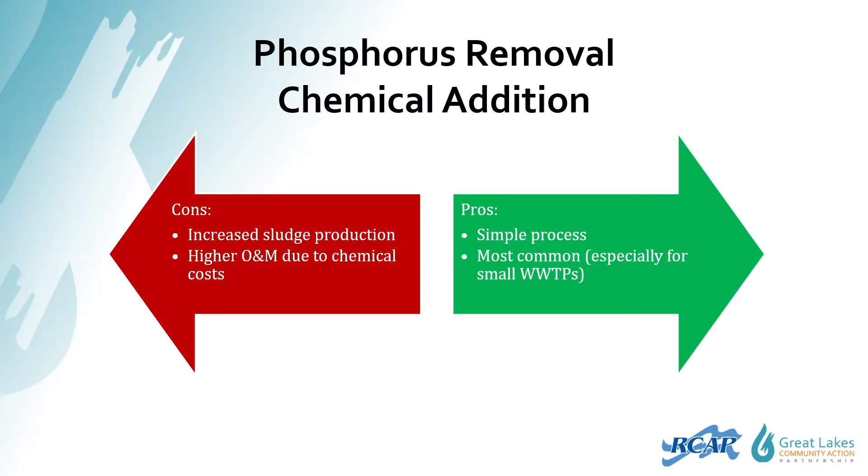Again, the chemical additions, pros are a simple process. It's most common, especially for smaller wastewater treatment plants. Cons, increased sludge production and higher O&M due to chemical costs. So again, if you're worried about chemical costs, it is going to drive up some of that price, but it is possibly going to reduce some of the nutrients that you have going through there and some of the future issues. So it's something you need to balance. Again, phosphorus removal, enhanced biological, lower O&M costs. Cons, higher capital costs again.

So, talking about management and regulatory solutions within these. With these, like I said, we have a lot of regulatory elements. So this is where it becomes key, working with the IEPA and your engineers or anyone who's worked with these in the past on what we're going to be doing with them. We know what they are, we know how they work, we just need to figure out what we're doing to get them completed, get them funded, and have them properly permitted once they're put in.

So again, looking at the responsibility matrix of who is going to put these in, who is in charge. A lot of times you do want to bring in your local health department, who's done permitting for the septic. If you're converting from septic to a traditional treatment plant, the county health departments are going to have the majority of that information on hand, and what needs to be done, how that conversion will work, and what permits are needed.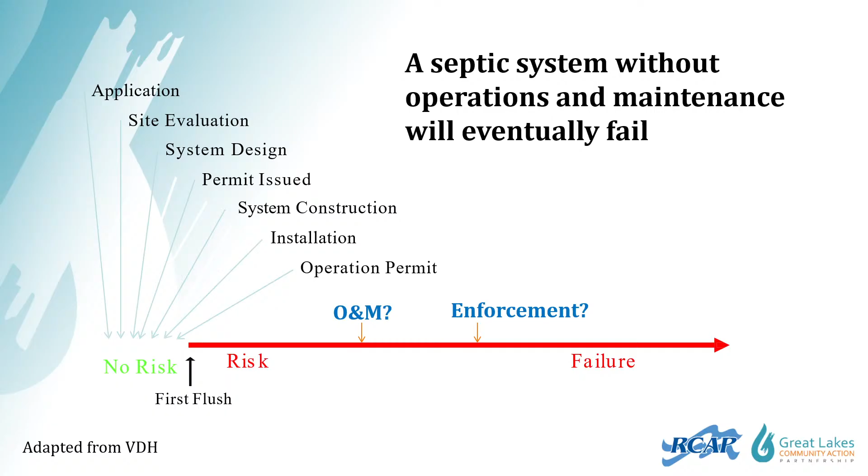So, again, a septic system or really any system without O&M will eventually fail. So that's what we're talking about here: if we do put in one of these conventional or non-conventional decentralized systems, or an alternative, what would the O&M be? And how do we fund that, and who's going to be in charge of that? That's where the permitting becomes super important, and the ordinances within the system and how it is structured becomes a lot of the questions that we're trying to move forward with.

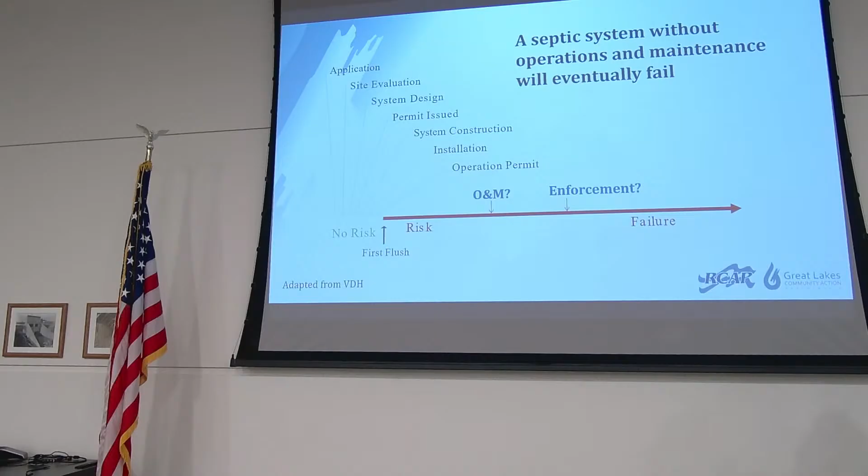Again, who's going to be responsible if it fails on the homeowner side? If you do tie in and we are paying rates, are those rates going into a pool that will collectively help everybody? Are they just going into the basics of the decentralized system? We've seen it every which way on that one. I can't tell you one way or the other that works the best. But really, if you're doing a rural area, creating a sewer district that is going to be responsible for the system is one of the big ones.

So again, we're talking about the responsible management entity, the RME. That's who's going to be in charge of the O&M, the financing, and the monitoring and reporting. So again, there's every which way we can go on the management options and who's going to be in charge of it. You can have a public authority, a public not-for-profit corporation. If you're in an unincorporated area, we see this quite a bit, where a not-for-profit is created.

Again, not on here, but HOA or homeowners association, which falls into one of these a little bit, kind of goes in that as well. But basically, we want to figure out who's going to be responsible for this thing, who's part of the maintenance, and what do we need to do to run it properly.

So entities that can serve as RMEs: county boards of health, homeowners associations, public water systems, rural cooperatives, or watershed districts. So again, those are the ones who can kind of run it. It just depends on how you want to structure it if you do start to create one. If you already have an established system and you want to convert to one of these, obviously you're going to be looking at probably a public water system.

Now, if it's something brand new or, like I said, not in a particularly incorporated town, we need to start looking at other alternatives. So that's just the law on that. I'm not going to bore you with all that.

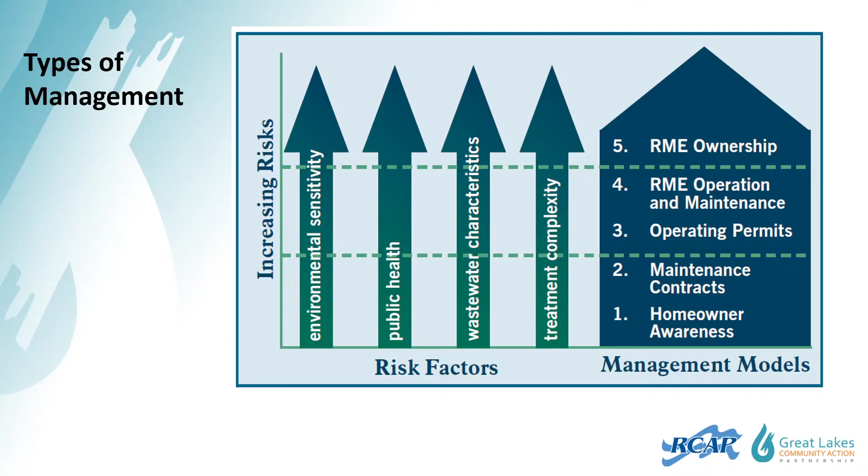Who's responsible for what? How is it going to be billed? How are we going to be saving the money? And how are we going to be able to get funding for this? So again, each one of these does have a level of risk. We can go through these one-on-one if it's something that you're interested in in the future. So success hinges on proper O&M.

Imagine a wastewater treatment plant without an operator. This would be the same exact thing. If you do put in a decentralized system, imagine there being no one going out on a regular basis, checking to see if everything is running properly, if everything is being done up to code and doing what it's supposed to. So again, kind of thinking about why the status quo isn't working.

And it's not working because, one, your traditional systems are becoming very hard to afford. And two, keeping people on traditional septic systems is not always the best either, while they do run very well. Let's face it, a lot of homeowners are not the most responsible. They're either not going to pump or they're going to continue to run those to the point of failure or have issues.

So that's kind of what we're talking about here: what do we need to do to create a system that will allow an RME to come in and make sure that everything is handled properly for everyone within the community. So 3 reasons to address failing septic systems: environmental health, human health, and property rights, with failure cost burdens as well. If your septic system fails and it runs into your neighbor's system, what are we going to do? How do we do this? And again, these decentralized systems are a way to help avoid some of these main issues.

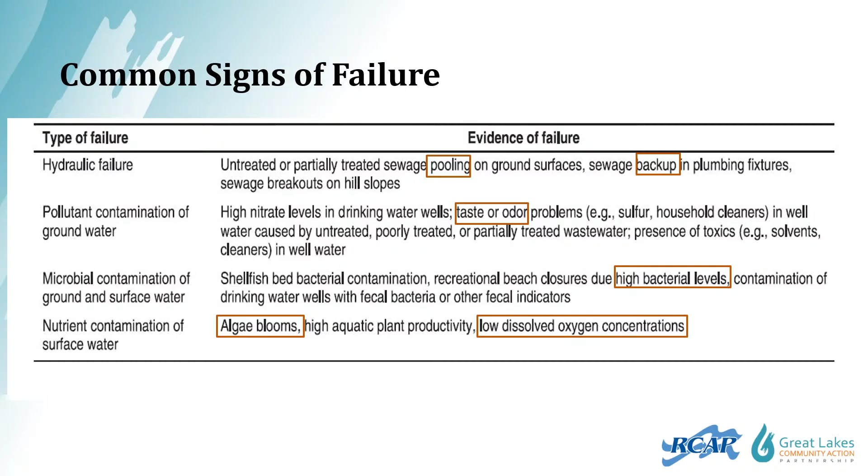So again, here's a list of pollutants. Basically, wastewater can obviously be harmful to humans, and that's what we want to make sure of. So how can we address these problems? Inspection process, obviously. Even once you put in the decentralized system, you want to be able to do an inspection. You want to make sure we're avoiding all of this as well.

Operation maintenance on-site numbers. 20 plus years of continuous operation. You want to replace components periodically. Component replacement, 6 to 9% of O&M costs. So again, we want to look at those filters and membranes, those pumps, those valves, those meters. We want to be able to have an asset management plan so we're aware of what is actually within the system and what we need to do to be able to keep that going properly.

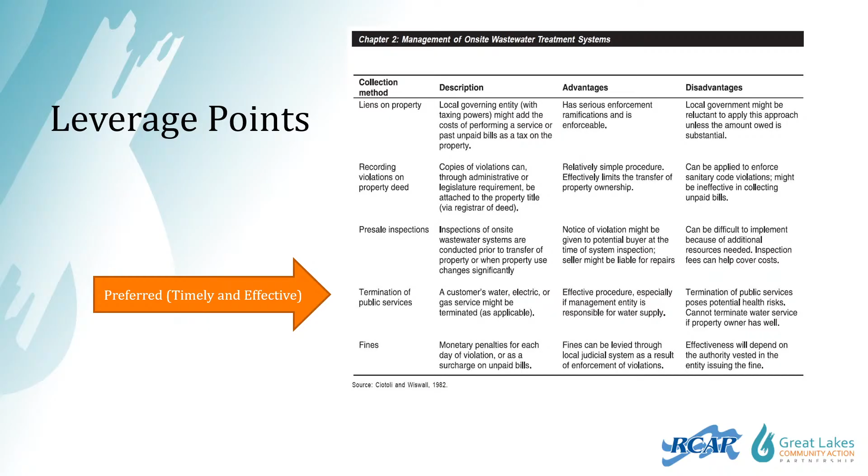So again, looking at our leverage points here. Liens on the property? What do we need to do to be able to do that? And what do we need to do once the system is put in so we can continue to manage it properly? So considerations in the planning process. So again, you want the community and customers to buy in. Again, you don't want them having something that they're not aware of or what is happening. You want community partners and specific problems definition.

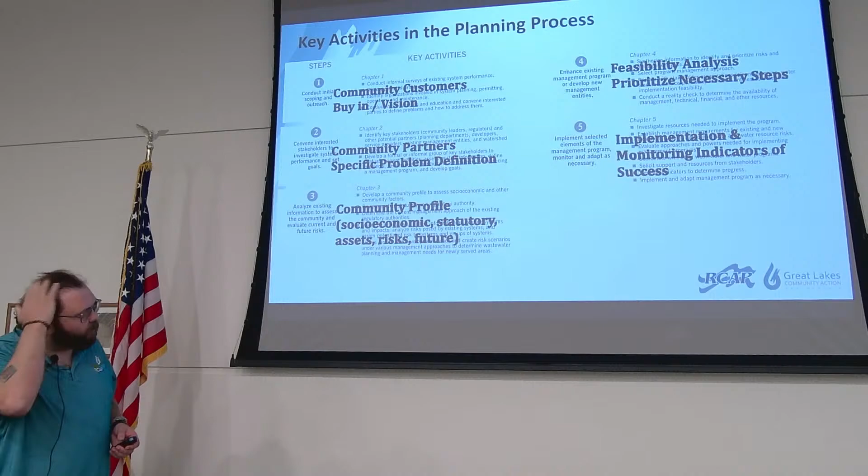So you want to know, what is the problem? What are we trying to address? Are we trying to address failing septic systems? Are we just trying to address a lack of sewer treatment altogether? Do we have a sewer treatment plant, but it's currently failing, and now we're looking into an alternative? Basically, what do we need to be able to do?

Community profile as well. You want to look at the socioeconomic and statutory assets for the risks in the future. You want to see, is the community growing? If it's growing significantly, a decentralized system might not be the way to go. You might want to look at a more traditional system because you're seeing a significant amount of growth. At the same time, if the community is shrinking, what do we need to do to address that, and how do we need to plan for that in the future? You want to look at a feasibility analysis and implementation and monitoring indicators of success.

Funding sources, how is this going to be funded? That's always one of the main ones. We can go through the individual ones with you here. But basically, all our main sources in the state of Illinois, I believe, will help fund these. So again, looking at some of the theories here. So you want to avoid the cost with decentralized wastewater systems by treating near the point of generation. So again, as it comes out for that homeowner.

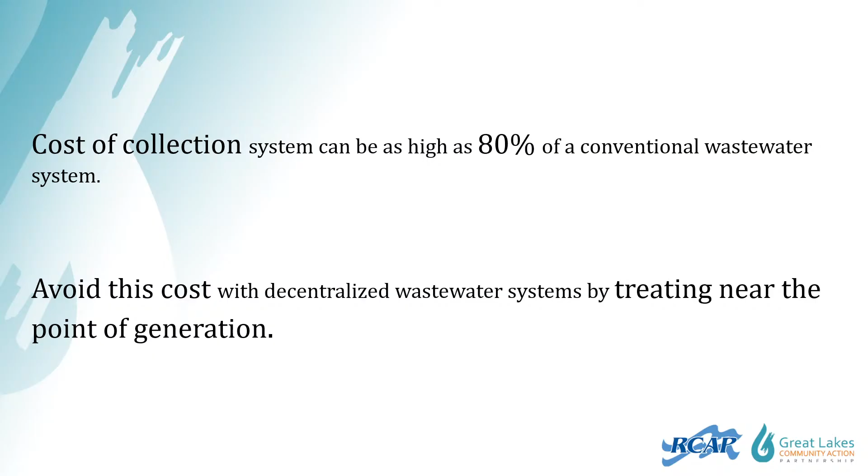Several small conventional centralized systems, several clusters, and on-site systems. That's what we're looking at when we're talking about these decentralized systems. So you want to avoid high costs of interconnections and choose appropriate decentralized system according to development density, site conditions, and waste characteristics. Again, we had talked about this, but how much is it going to cost? We run into a lot of rural communities. Cost is one of their main things. Again, thin TMF, part-time mayors, city councils, in charge of this.

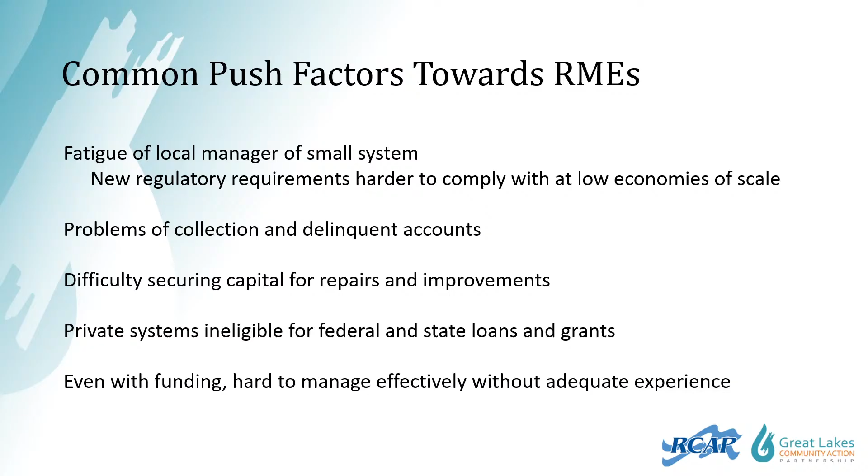So who's going to be in charge of the decentralized system? A lot of times in rural communities, you have volunteers. So what do we need to do? An RME is more than just operation maintenance. Obviously, there's going to be more. You have to be in charge of training your employees, hiring your employees, making sure everything is run properly, permitting, those things. So again, common pushes towards that. Fatigue of local managers. So again, having a responsible management entity in charge of these, a little bit different than someone going through your traditional route. And again, a few examples of those.

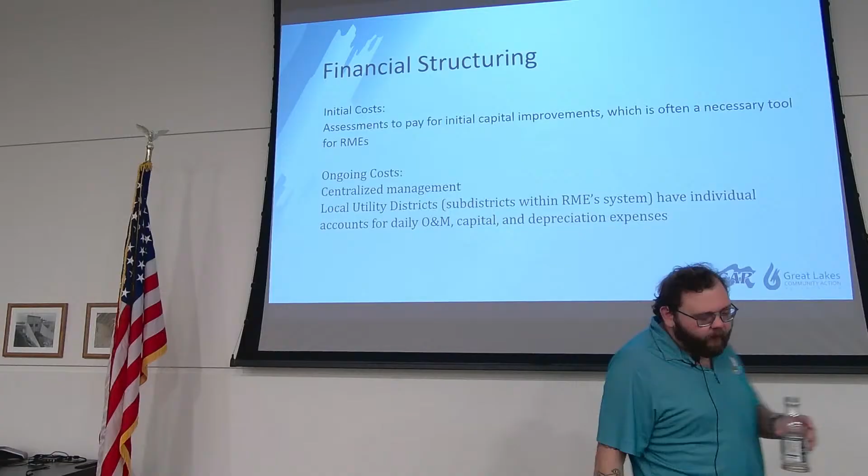So, talk about your financial structure, your initial costs. How much is it going to cost to go through there? And then you're going to have your ongoing costs, centralized management, local utilities, and your daily O&M as well. Strategies for publicly owned RME structures, utility districts, and cooperatives. Again, these are one of the ways that you can set those up and represent those. Again, then private joint ventures as well. So talk about the management plan.

So once you do start to put these in and you have your RME established, what are you going to do? Inventory of systems and conditions, inspections by a professional at least once every 3 years. So you want to have a professional out there who will inspect the system on a regular basis. I would suggest probably more than that, but it says at least. I would go a little bit more than that. Tank pumping every 3 years as well. So you want to make sure that everyone is on a tank pumping schedule. Because again, the last thing you need is something backed up.

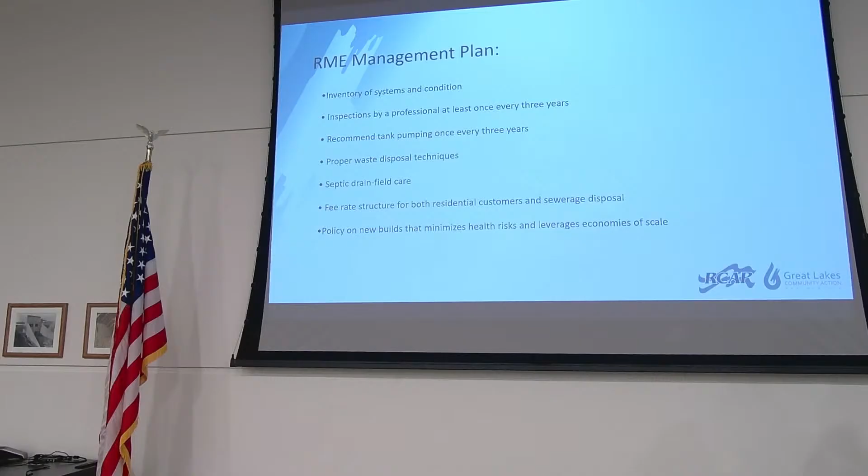And again, that is the question of how is that going to be funded, and that will go through the RME structure. Proper wastewater disposal techniques, septic drainage field care. Are those drainage fields being taken care of? Are they doing it properly? Fee rate structure for both residential customers and sewage disposal. And policy on new builds that minimizes health risk and leverages economies of scale. So again, this is giving a basic example of how much they cost and what we can do there.

A decentralized sewage system is defined as the collection, treatment, disposal, and reuse of sewage from individual homes, clusters of homes, isolated communities, or institutional facilities, from portions of existing communities or near a point of waste generation. So that's what we're talking about: creating these clusters, getting them collectively and getting everything together. They're effective and economical. They consist of many different approaches to treating wastewater: lagoons, batch reactors, and clarifier treatment.

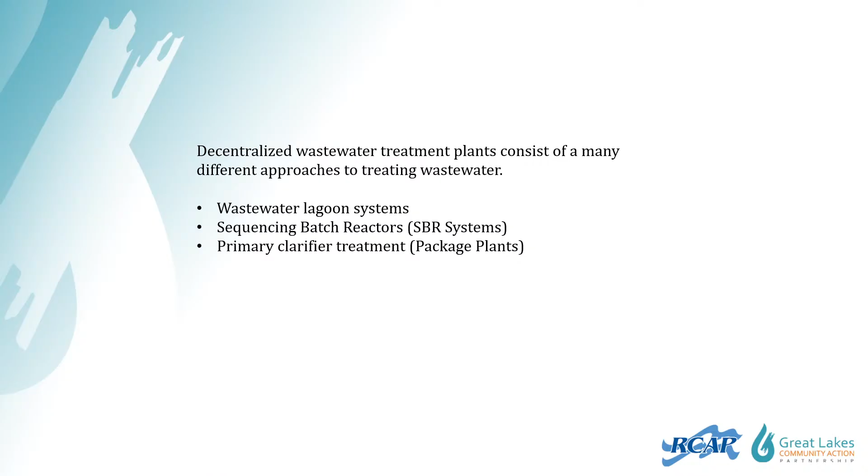So the advantages of the decentralized systems: given the smaller flows, sewer size is also smaller, and depth and cut are also less, making it easy to construct and manufacture. So that's going to be a big one too. We can get them up quicker. We can get them running. They're easy to construct. As we spread out in these communities, operation and maintenance becomes an issue. This way, if several communities put one in, you can hire one operator to take care of everything, as opposed to having several different ones.

All right, and that's all I got on decentralized systems. I know we went through a lot of information there, but if you guys have any questions about them or want me to go into more detail, feel free to reach out. I do have cards over there. That's basically all I got.

I would just add one thing with the decentralized systems for this group. The idea that they're pushing forward is instead of having one giant class 1 plant to collect over a large area in some of these rural communities, they're pushing for smaller, more itemized treatments, whether they're RBCs, small package systems, things along those lines. They're generally cheaper to run in the long run. They generally take less energy, so they cost less to build, they cost less to operate, and that's why this idea is being pushed forward a little bit more on the rural side. So that's the ultimate of this.